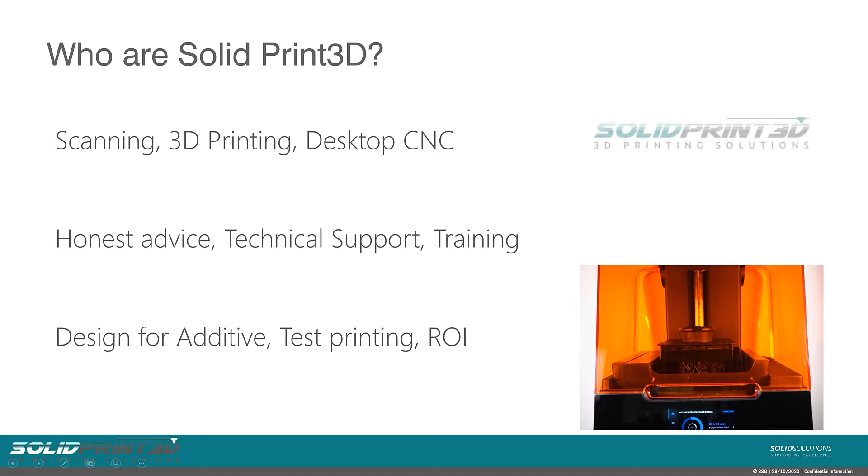So who are SolidPrint 3D? Well, we are Solid Solutions' sister company who specialise in scanning, 3D printing, and desktop CNC machines. We give honest advice on how these machines can help your business, and then provide the technical support and training to go alongside them.

If you want to know about the process we use to find out if we can assist you: we give some design for additive manufacture advice for your individual part files, we can then look into some test prints for you, and then use these to create a return on investment study.

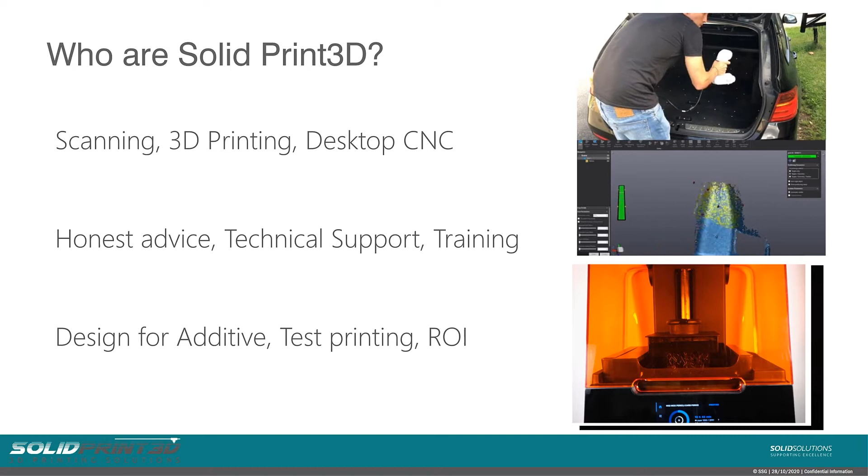So how have we actually helped customers before? Well, we did a video quite recently with SNG Barrett. They produce parts for classic Jaguars. If you want to check out this video, it's on our website.

Today instead we're going to run through a different case study, one we've done quite recently with Joe Townsend of JT Custom Adaptive. He's a Paralympic athlete who came to us looking for assistance on how he can 3D print his bespoke end-use parts for his bike and also his customers' bikes as well. So without further ado, here's the sit down I have with Joe, going through who he is and what kind of parts he's going to be printing and using on his bike.

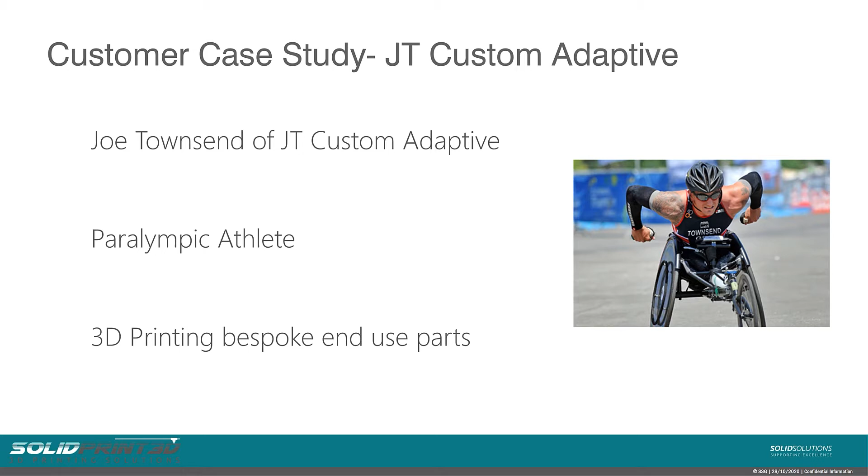My background is former Royal Marines Commando. I got blown up in Afghanistan in 2008 while serving with 40 Commando out there, which resulted in me losing both of my legs.

Throughout the rehabilitation process, I started trying different adaptive sports as a way and a means to get active again, give myself some drive in life, and allow me to do something that made me feel physically active and feel good about myself. Through trying all these different sports, I found triathlon.

In 2011, we were challenged as a team of injured servicemen to take on an Ironman triathlon - that's a 2.4 mile swim, 112 mile bike, and a marathon. I signed up for that, managed to complete my first Ironman in Bolton in 2011, and was hooked on triathlon from there.

I went on and did various Ironman triathlons, did the race across America twice - some pretty cheeky endurance events. I was just absolutely loving the sport, loved the freedom I had on the hand bike. The fact that I could go out, although I'm driving it with my arms, I could pretty much beat any of my able-bodied friends on a bike. It was a good feeling to bring that level playing field back, and your disability becomes irrelevant at that point.

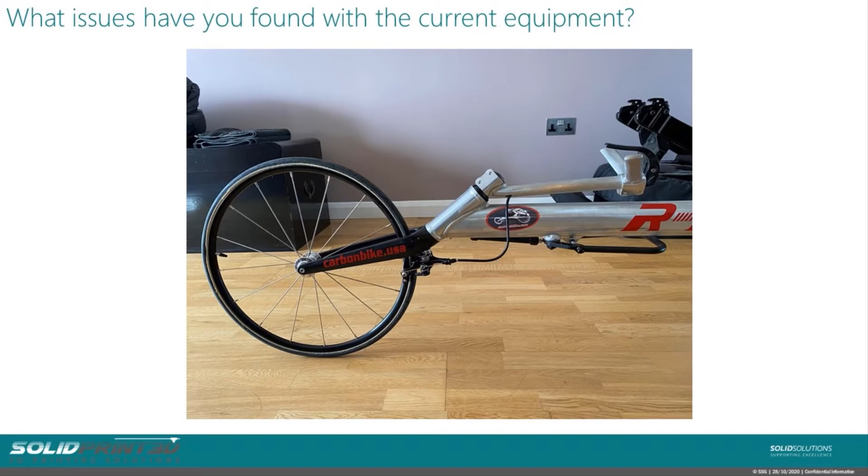You want items on your bike which aren't giving you a massive weight penalty, are going to be as aerodynamic as possible, and make the bike as fast, as stiff, and as strong as possible. As athletes we train our asses off and push ourselves physically as much as we can, but at the same time if we can improve our equipment, then there's gains and progress we get from that as well.

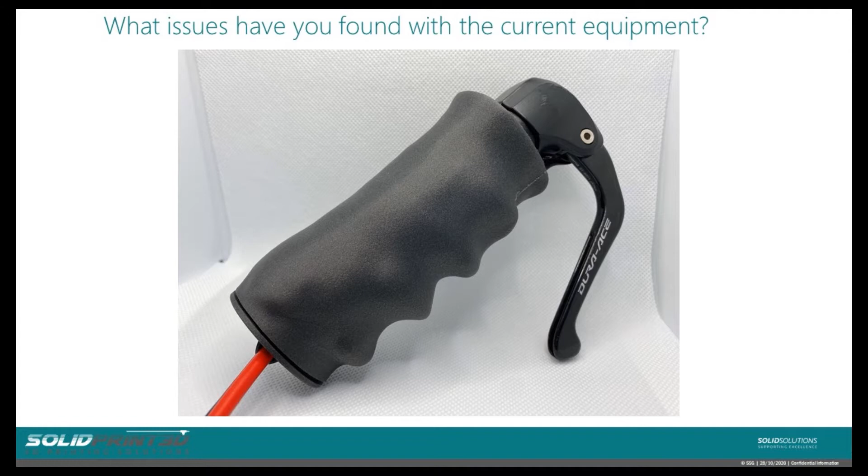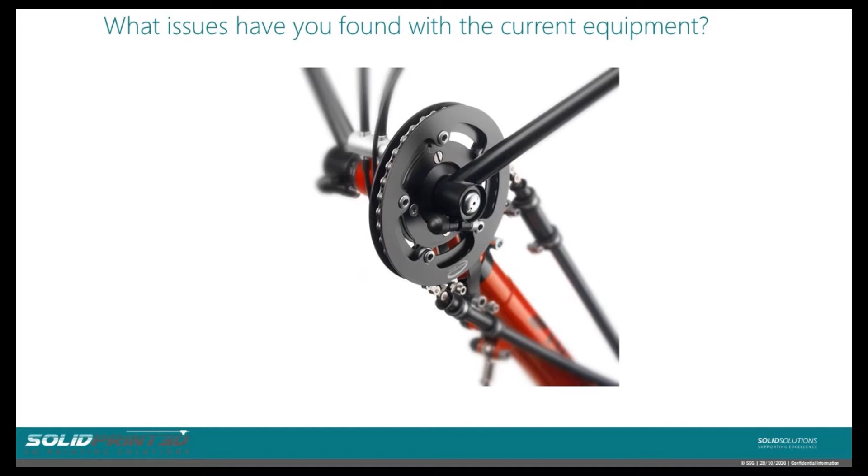I've been really keen on equipment optimization, and that's why I think 3D printing is so great. It's really hard to group athletes with disabilities into a category, because people's bodies, functions, and requirements are so varied. Whereas with 3D printing, it's so easy to make one-offs or small production runs, draw a file in CAD at roughly a generic size, adapt it to fit someone, and manufacture it almost instantly. You wouldn't be able to do that through any other production method without massive costs, which makes everything prohibitive for the athletes.

Take something like a road bike brake lever, like SRAM or Shimano. I've had that in a wind tunnel - they've spent thousands on research and development. But then you put a bracket on a hand bike, stick it on sideways, and it's pretty crap into the wind. It serves a purpose, it slows the bike down, but it also slows it down going into the wind. So being able to make short production runs of bespoke items that fit onto the bike gives a function, aesthetic, and aerodynamic advantage, as well as hopefully weight savings.

It's exciting to be able to do this now, because 3D printing used to be fairly locked down to very few people - it wasn't accessible not that many years ago. Whereas now, with patents being lifted and the technology moving on, and companies bringing out new kit, it's become more accessible to more consumers, to be able to make such bespoke, short-run items.

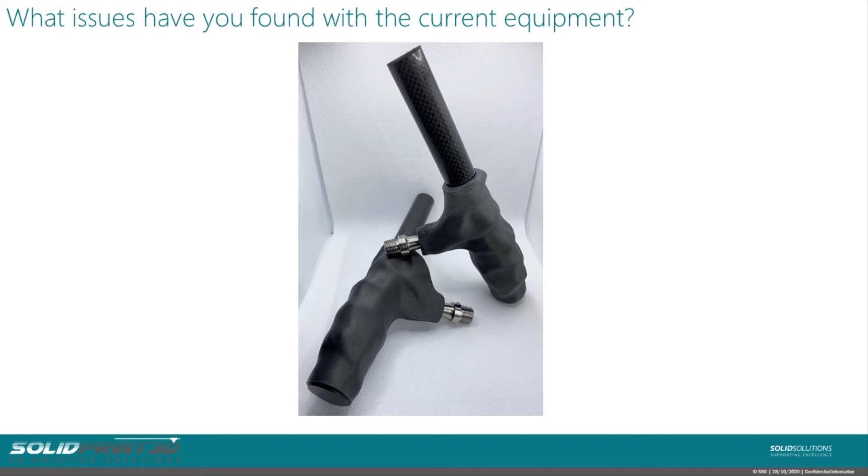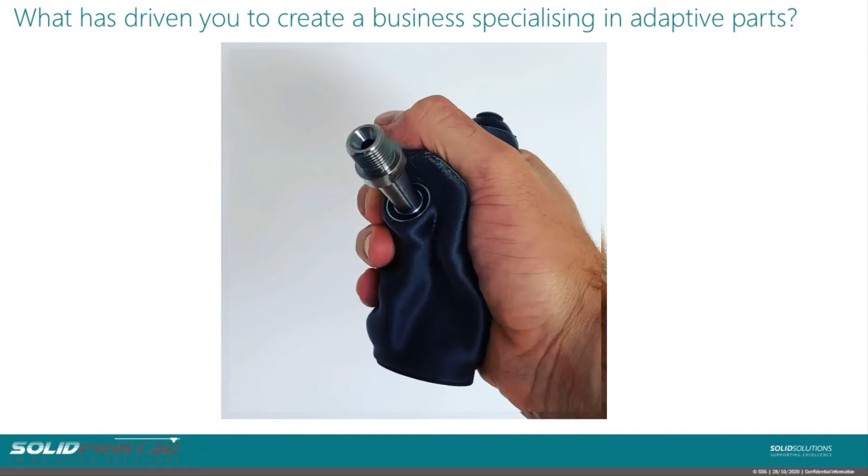Most of the ideas I've come up with myself, but I know the sport very well. I've been immersed in it for so many years, and I know what the shortfalls are. So I'm solving problems for myself, but at the same time, I know that if I'm having these problems, other athletes are having them too. I think that's why people have been so receptive to the grips.

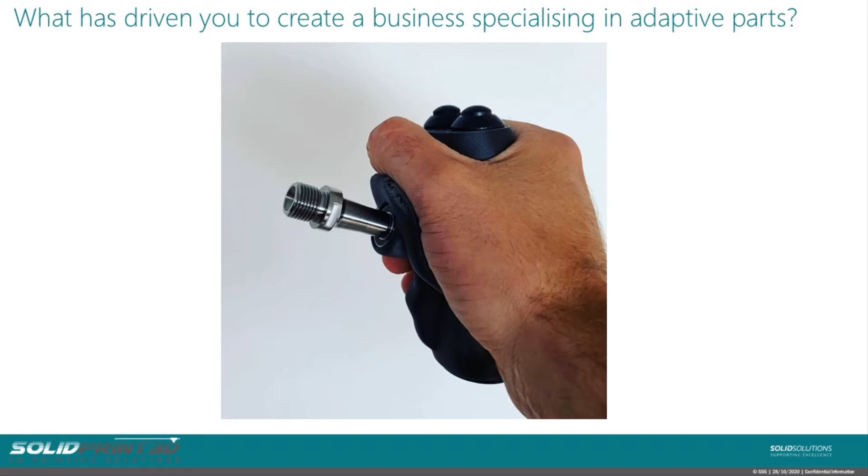It's something I've been trying to achieve for quite a few years, and I spoke to several universities and businesses about recreating what I've done. People were generally either uninterested, incapable of doing it, or the price was just too prohibitive. I think that's really where the 3D printing market and technology has moved on so well.

If I'm able to do this at home with no engineering experience whatsoever, just self-taught, it means I can open up an avenue and provide parts for athletes at a much, much reduced price compared to what they'd pay a company who are experts in this. Generally, for a company to take on just an individual one-off part, it's too prohibitive cost-wise for the athlete. So it's nice to be able to open up that avenue, solve things for people, and make their lives and their equipment better.

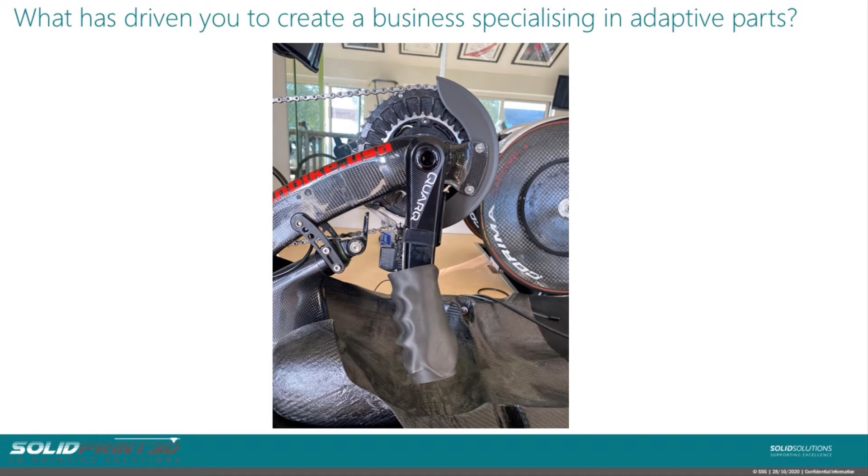What I've been doing is making custom hand grips for the bike. I'll 3D print a base shell, the shape of a typical bike handle but a little smaller, out of cheap PETG. Then I send it in a kit with some thermoplastic pellets, which you can heat up in hot water and mold and shape to any shape you want. I get the athletes to mold that around their hands and make a grip completely bespoke to their hands and their needs.

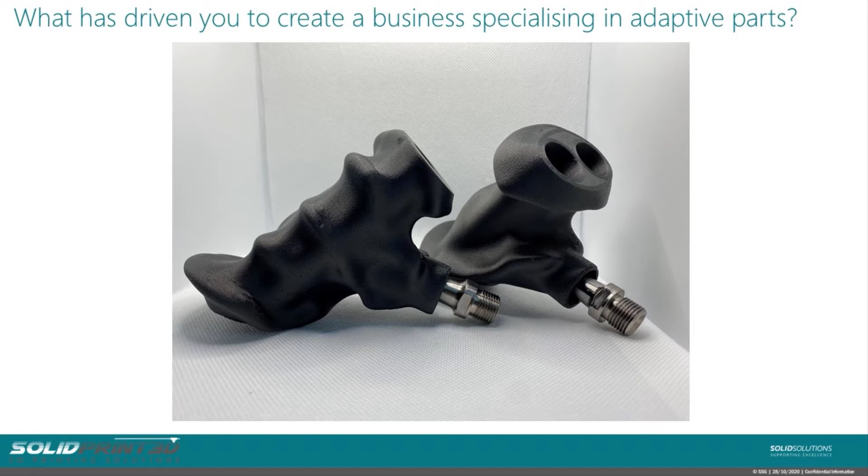Then they can try that on the bike whilst they've got the mold there. Using a heat gun or hot water, they can make fine adjustments. Once they've got their grip exactly how they want it, they send that back to me. I scan that onto the computer, make the edit, do the cutouts, the bearings, the spindles that are going to go through, and then print those ready to ship out.

You look at top-end road bikes and the amount of time they're spending in wind tunnels, how tidy they are with cable management - and you're paying a similar price, if not more, for a hand bike or a racing wheelchair. You've got a lovely frame, it's stiff, the cage is made beautifully to fit you. But you've just got a whacking great chunk of aluminium tube hanging off the top of it to steer it, and frankly, it's ugly and not great into the wind. So it's exciting to look at improving these and getting them out there.

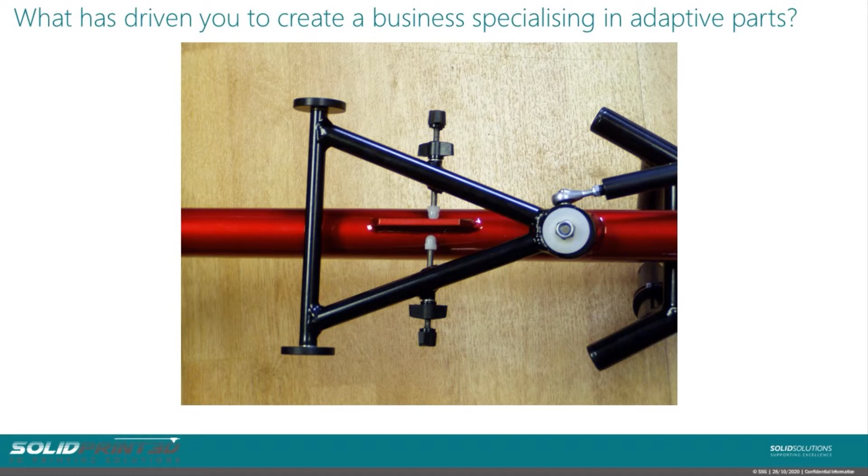Yeah, I think I've got 10 pairs of grips currently out worldwide. I'm getting orders fairly frequently at the minute.

And we've just started moving into racing wheelchair gloves as well, which is another technology. These are bespoke made to the individual athlete, and generally made out of aquaplast, a thermoplastic, which is great for molding the shape of your hands to get the perfect racing wheelchair glove. But it also has downsides in that it's heavy, it melts in the sun, and if you break it, it's near impossible to replicate an exact same glove.

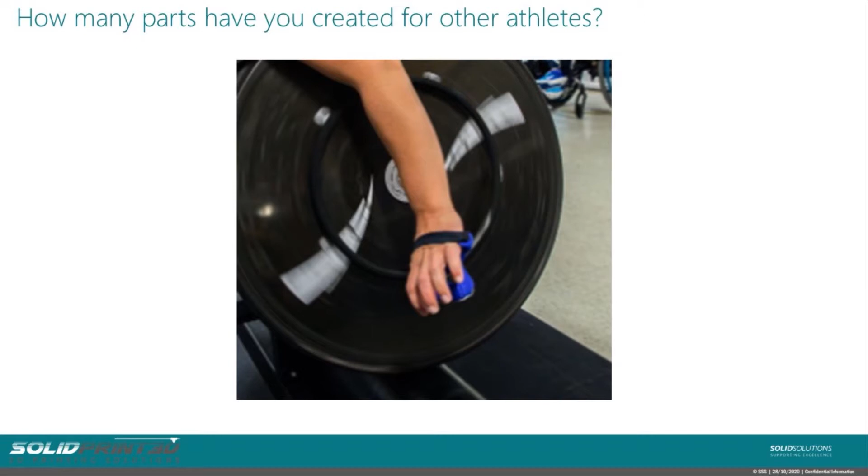Whereas with being able to take a mold, scan the print and save it onto your computer, you can have 2, 3, 4, 5 pairs of the exact same glove, and know that it's always on file. So if you break one, or lose one traveling to a race, you can have spares and always get another pair printed off.

So for disabled athletes, it's a real game changer. It's hard to explain to people how important these gloves are, but when you've made something which fits you like a glove, excuse the pun, and you know how you push on that glove and it is personal to you, when you try pushing on a glove which is slightly different, it just feels different and throws off your push.

So I know it can literally make the difference between being competitive at races and not. Being able to have the flexibility of having your gloves scanned on file and multiple pairs printed off, pairs set up for the wet, pairs for the dry, pairs for training - it's a huge kind of advancement for us.

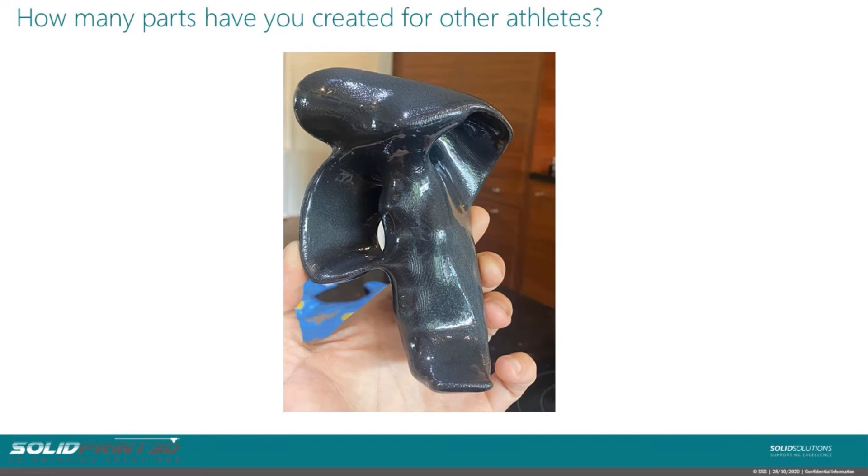It really is kind of, I don't want to say life changing, but the amount of worry I had with my racing wheelchair gloves. You go to a race, and as I say, I've got a habit of collapsing across finish lines. When you end up in a medical tent for an hour after the race and come out and all your equipment's gone - somebody's taken it back to the hotel for you - you can't just say, oh, where's my gloves?

I think it was in Rio actually - I lost one of my gloves after the race, and all you're thinking is, I've got a race after this and I don't have a replica of this. Luckily it did turn up at the race venue, it had been dropped, but it's just a worry. As an athlete you've got enough weight on your shoulders having to perform, the conditions you're racing in, travel, everything else - it's nice to eliminate one more worry that you've got in your mind.

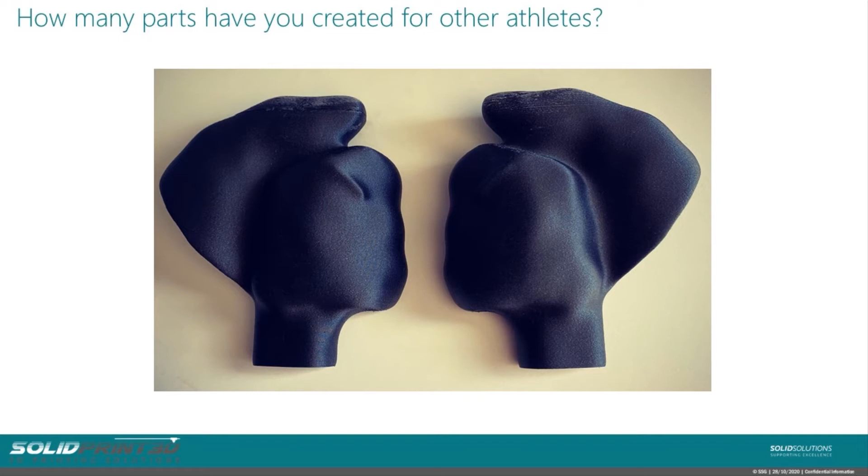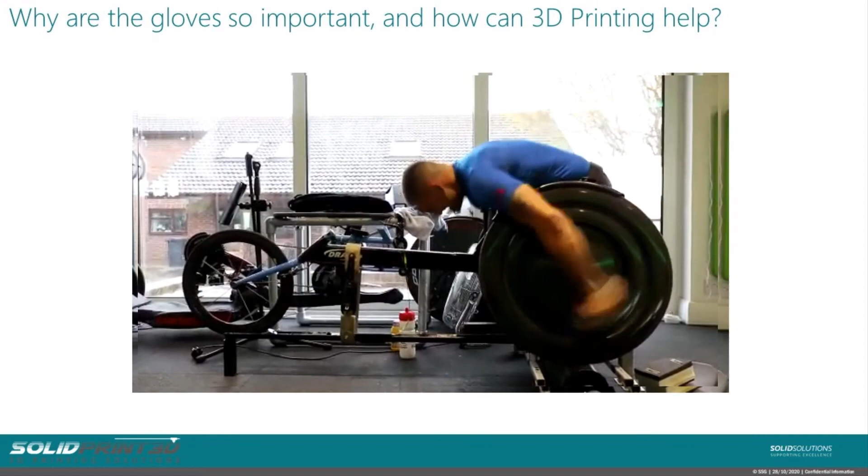So you're aware of how athletes push - you're basically hitting a hard glove, covered with rubber, onto a push rim on the wheel. You're coming into the push rim with quite a lot of impact, which puts a lot of pressure through the wrists. It's kind of a punchy motion as you're coming onto the push rim. There's a lot of impact there, and as a repetitive movement, if you're a marathon athlete doing it for an hour and a half, two hours, plus the training day in, day out, it's a lot of impact.

That's something else with 3D printed gloves - you could have a super stiff pair which you use for racing, which might give you that fraction of an advantage but play havoc on your wrists, and then have a softer pair which you're pushing day in, day out for training, fractionally slower, that allow you to train comfortably without causing injury.

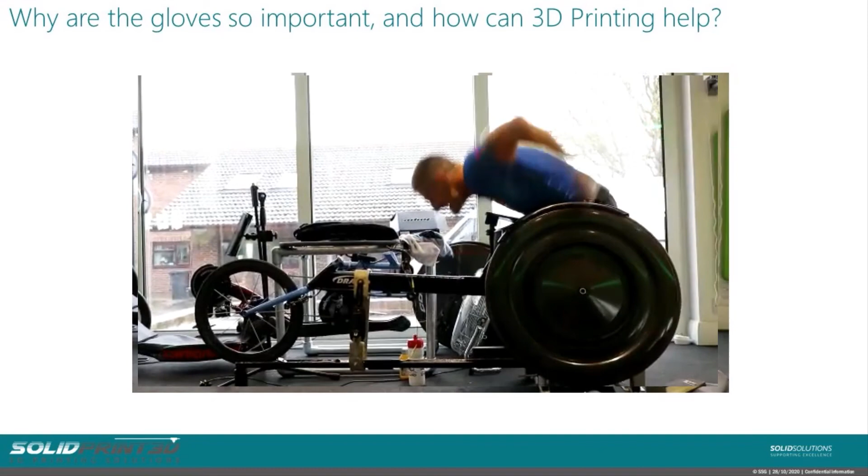Yeah, the gloves have different pushing surfaces depending if we're in the dry or the wet. So in Chicago, I did the first lap on my dry gloves, the heavens opened, absolutely monsooned it down, and I dropped back into transition on the next lap, which was a detour, but I had to pick my wet gloves up and get going again because I was losing so much time not being able to push.

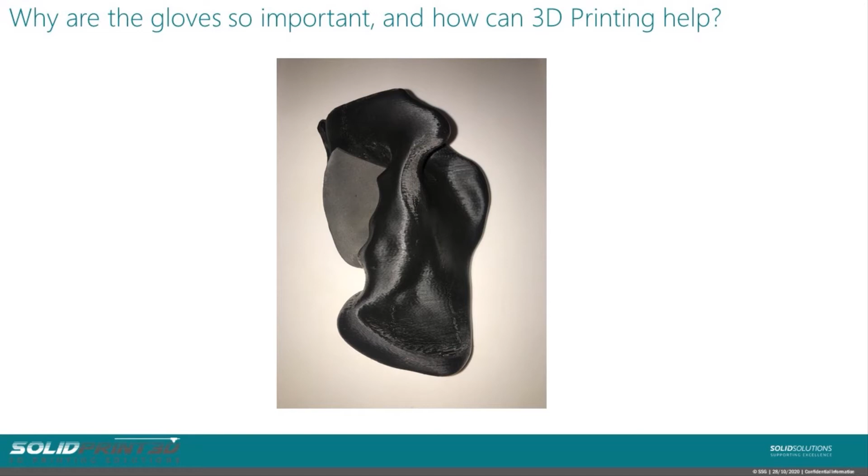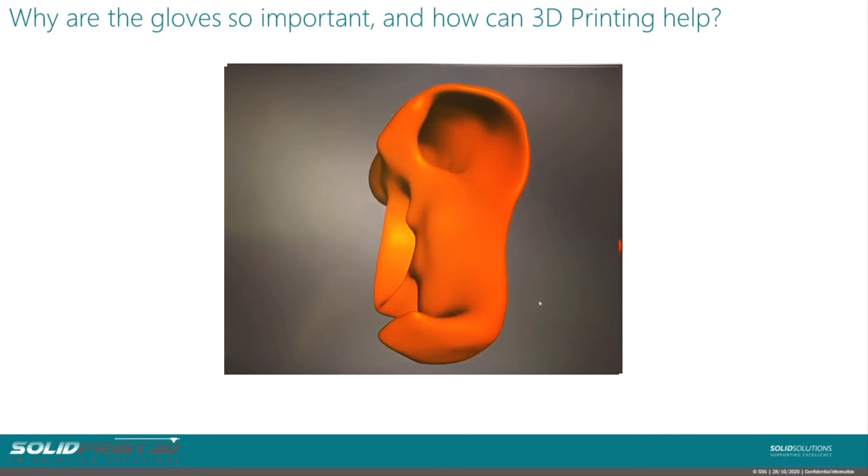So traditionally you have two sets of gloves, but you can't make two exactly the same, and everyone's got a favourite pair. Whereas now with 3D printing and scanning technology, you can have as many pairs - I think I've probably got about 12 pairs of my gloves at the minute, at various weights. It's nice to have the flexibility to play, and just know that you're guaranteed several sets of gloves which are going to fit exactly the same when you put them on.

You can't really buy racing wheelchair gloves off the shelf anymore. They're all individually made, most people making them themselves, which is an art in itself, and not everybody's going to be able to do that, so that offers up a great window. But as far as I'm aware, nobody else is offering the bespoke nature of the service - if you've got a racing chair glove, I will scan it and replicate it for you. And nobody else is doing the hand grips for the bike - that was my idea. It's the real bespoke nature of it, not just something generically sized up and down, but something purely bespoke, made to you.

3D printing appears to be the perfect technology for it right now, printing lightweight, strong parts which can easily be replicated in a short time frame. Most gloves available on the market are made out of ABS or PLA or PETG, and I've seen several pairs breaking - people have come to me after I've made gloves for them. But to be able to get on the Markforged and have that level of print quality and strength, it's just a game changer, another step forwards, hopefully able to create grips and gloves which will last indefinitely, unless someone crashes the bike or runs one over in the car.

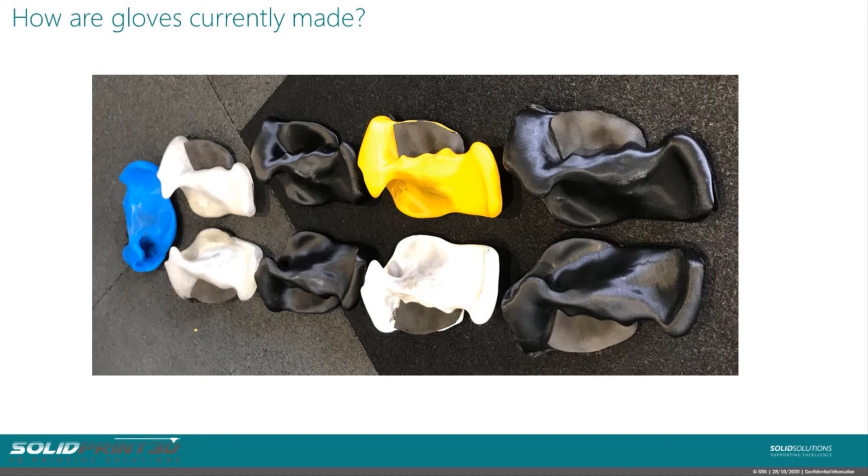One of the biggest things, well for myself and a lot of athletes I know, is shoulder health. We're using our arms literally all day, every day for everything. If your bike's set up and you've got a crank arm which is slightly too long for you, the results can be catastrophic. I had shoulder surgery back in 2014 - I had my shoulder reconstructed, and that was predominantly down to spending years and years not being correctly set up on my bike.

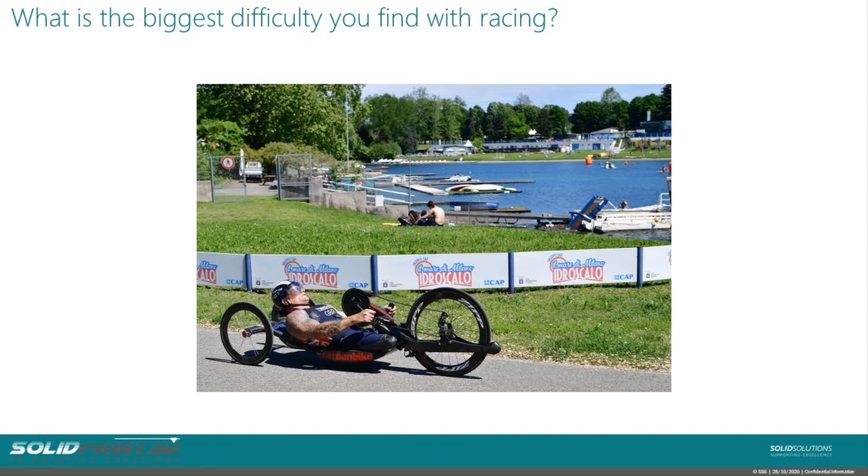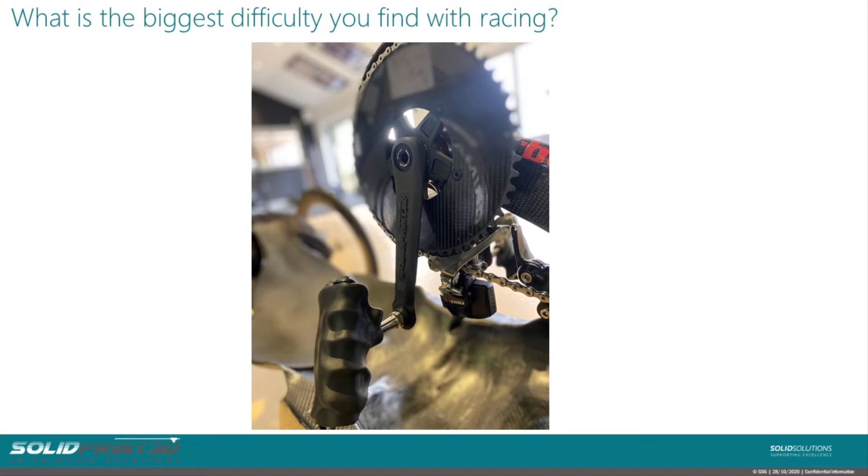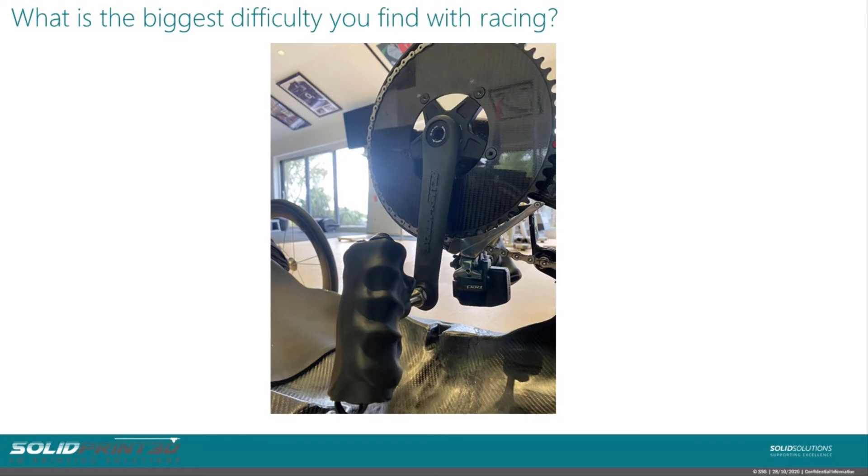Basically, the only real difference between this and a standard crank arm is the Q angle - the offset that the pedal or hand grip has in comparison to the crank. A standard road bike or mountain bike crank only has a very minor Q angle as the offset. If you're doing 100 revolutions a minute for hours and hours each week, just slowly grinding away, slowly overreaching, straining cartilage or the musculature trying to hold your shoulder in place - which is a lot more complicated than the hip joint - people can develop problems. So again, everything comes back down to bespoke nature, and unfortunately with adaptive equipment, things literally have to fit like a glove for athletes to get the most out of them.

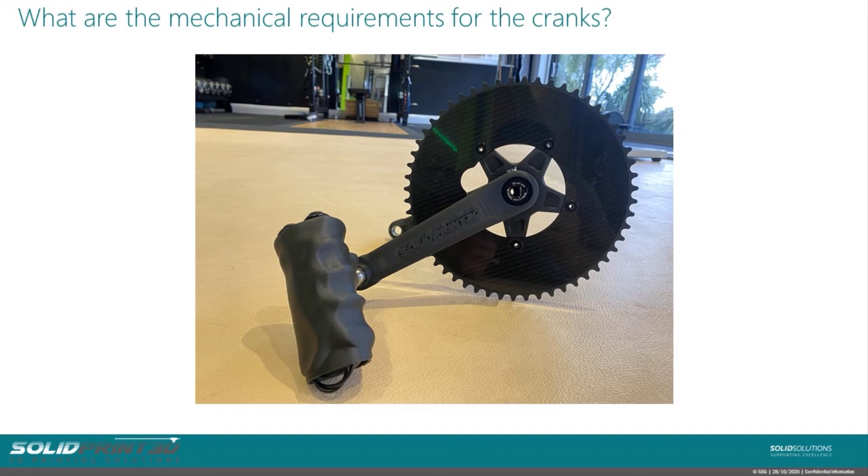Structurally, the big thing with these cranks is the torsion running through the crank. You've got the hand grip or pedal creating that twisting motion down the centre of the crank, so a lot of it comes down to layering the carbon reinforcement in properly. You've got the strain of the part twisting, as well as the rotational strain of the spider at the top where it mounts onto the bottom bracket axle. So it's getting loads and forces applied in several different directions. It's about printing it in the best position possible so you can get the reinforcement running in the right planes to give it the correct strength and stiffness.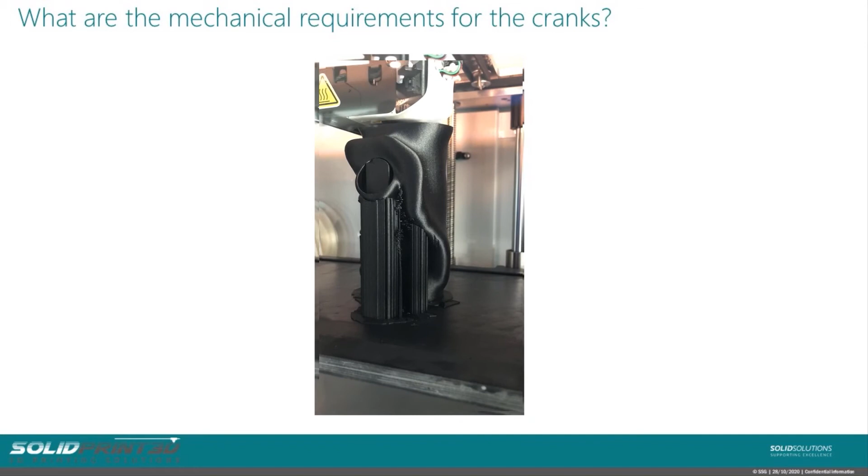The grip you guys printed for me is brilliant - the quality that's come out of it is fantastic, and I haven't broken it yet, which is good. You guys printed me some prototype crank arms for the bike, which I've gone and broken all of them on purpose for testing - just testing the strength of what I'm going to be able to achieve with your print. But I'm really reluctant now - I love the grip, so I really don't want to break it.

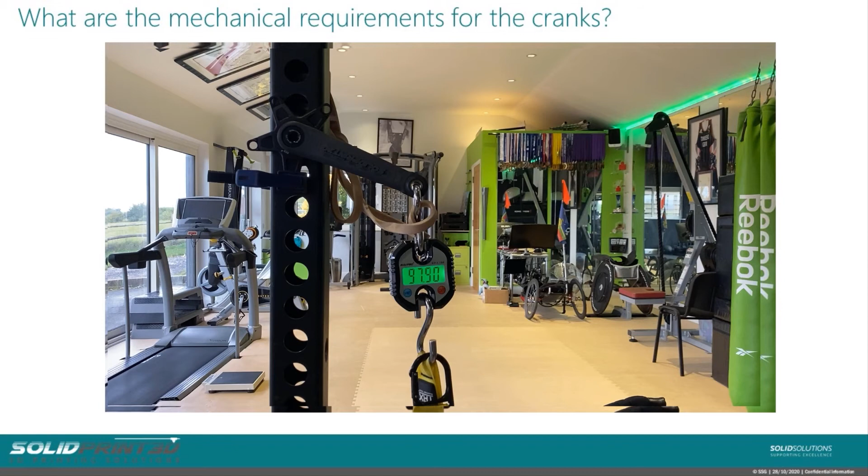With the Markforged especially, it just opens up a whole new product line of what can be created. Being able to print parts which are lightweight, incredibly strong, and can be manufactured as one-offs relatively easily is a huge step forwards. I come back to the individual nature of disability again - most things custom made for bikes tend to be welded out of aluminium because they can be reasonably bespoke, made to measure relatively simply.

But then you tend to get parts which are relatively heavy and not aerodynamically nice into the wind. And to be honest, they don't look great either when you've got a really expensive, nice racing wheelchair and just a bit of aluminium tube hanging off of it. It doesn't look the best, but with something like the Markforged 3D printer, I can replicate those.

I can tune them to be aerodynamically efficient into the wind, which is going to have a performance advantage, especially when you're travelling upwards of 30, 40 mile an hour in a racing wheelchair going downhill. You want to be taking that aerodynamic advantage. It's just a way to kind of push the sport, push the equipment on.

So I've got some of the wind tunnel testing. There's quite a significant advantage of raising the back of the bike up a couple of degrees. Yeah, we got that out of some of the wind tunnel data. So I've created some risers on the back of my bike.

Currently, I'm basically using a parallel bit of steel tube, steel clamp, which weighs nearly as much as the bike. I've been using it for about a year now with training a bit, and it's doing the job, but I wouldn't race on that setup, obviously because of the weight penalty. I believe that it'll be amply strong enough to go on the back there.

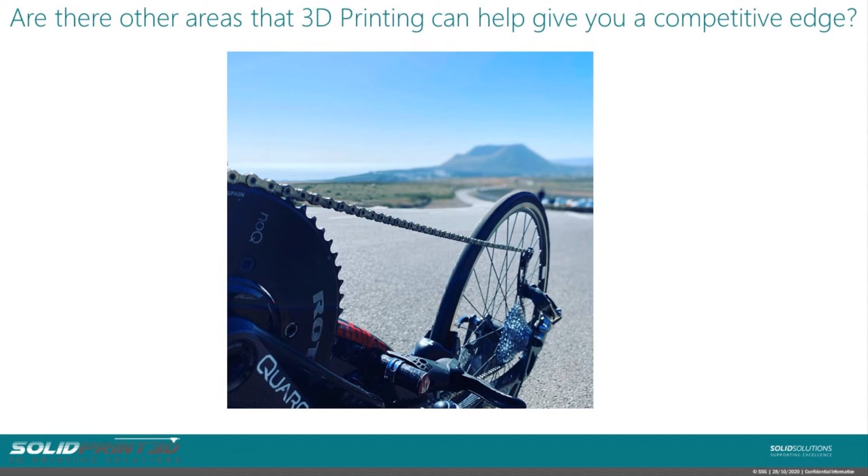Bear in mind the bike weighs 11.5 kilos, which is not light, but it's fairly light when you see the size of the bike. In fact, it's got 3 wheels, and there's a lot of carbon fibre there, so it's a huge percentage.

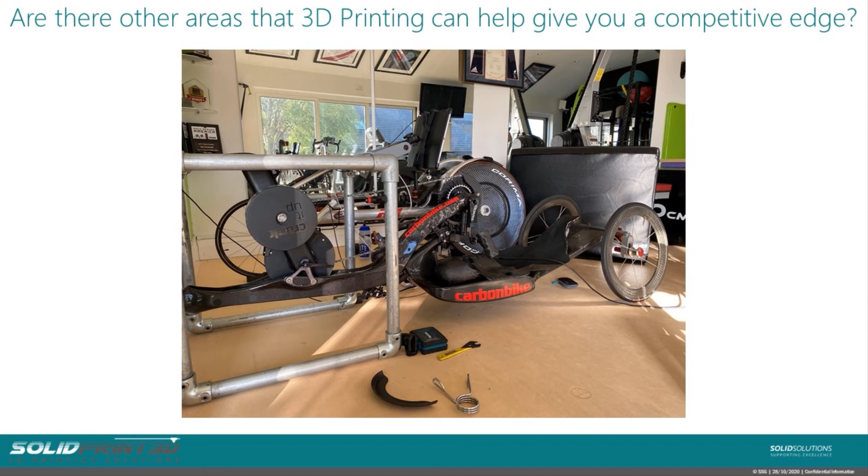And again, I've looked to get the parts machined, and it's just colossally expensive. Whereas 3D printing can have the part made significantly cheaper and achieve those kind of aerodynamic shapes, those smoother shapes, which when you're having things machined, the machine's obviously got to do a lot of work, it's got to run a lot of angles, and it just keeps bumping the price up of what you're trying to achieve.

The riser at the back of my bike, I was quoted over £600 and 8 weeks lead time, I think, which is massive. And as I say, that's for a first attempt.

Whereas you can 3D print them for reasonably cheap. As I say, just do a test piece, and then if you know it works, then you can go full carbon through it and spend a bit more money on the part. But it's just easy to adapt the file, and you can get it within a day. Just stick it on overnight and wake up the next morning and your part's there.

Yeah, I think just being able to kind of fix captive nuts and put threaded parts in. So the design I have for the riser, the wheel screws into what we call a boss. It's a bit of aluminium tube, and what that allows us to do is the wheel's got a camber on them. As we rotate the part back and forth, you can adjust the toe in, toe out of the wheels.

So you always want to have a bolt there to do that, to be able to make sure your wheels are running dead straight. It's really hard to make a part and then for your wheels to just work perfectly and always work perfectly.